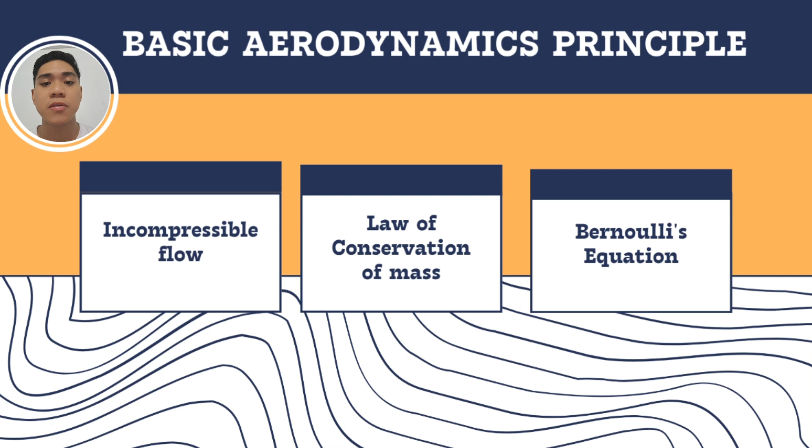Today, we will dive into the science that makes it all possible. In today's video, we'll be navigating through some fundamental concepts and applications about incompressible flow, conservation of mass, and Bernoulli's principle. In the latter part of the video, we'll also tackle some sample problems to help reinforce our discussion and show how these are applied in real-world scenarios, so we can have a solid foundation in aerodynamics and its practical applications. So without further ado, let's get into our discussion.

For our first topic, we have incompressible flow. When we say incompressible flow, it refers to a flow in which the density remains constant. Presented on the screen are some of its characteristics.

For the first characteristic, density is constant. In incompressible flow, the fluid density remains constant throughout the flow field. This means that regardless of pressure changes or velocity variations, the density does not fluctuate. This assumption simplifies fluid dynamic calculations, especially when applying principles like Bernoulli's equation or the continuity equation.

For the second characteristic, we have velocity less than 100 meters per second. At velocities below 100 meters per second, changes in pressure due to motion are so small that they don't significantly affect the fluid's density. This is often true for low-speed airflows and liquid flows where compression effects are negligible.

For our last characteristic, we have Mach number less than 0.3. The Mach number is the ratio of the speed of the flow to the speed of sound in the medium. When the Mach number is less than 0.3, the flow speed is much lower than the speed of sound, and changes in pressure due to the flow are minimal. In this regime, the fluid behaves almost as if it's incompressible, even for gases like air. In other words, the density changes are negligible at these low speeds.

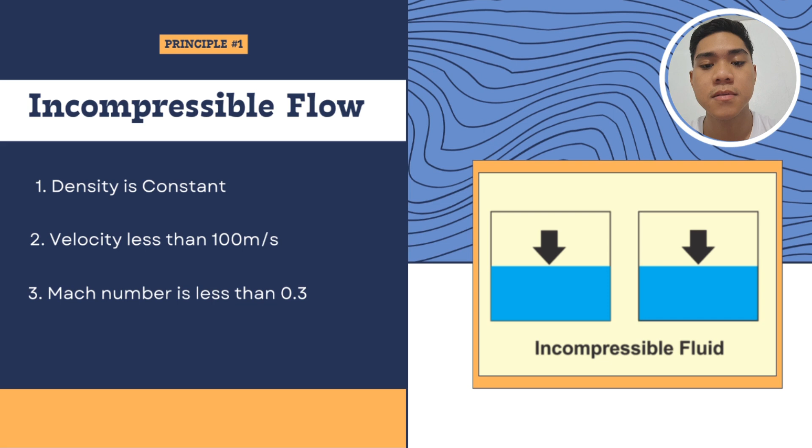For our next topic, we have the law of conservation of mass. The conservation of mass principle applies to both compressible and incompressible flow. Under this, we have mass flow rate and volume flow rate, both of which will be discussed. So what exactly is conservation of mass?

The law of conservation of mass dates from Antoine Lavoisier's 1789 discovery that mass is neither created nor destroyed. In other words, the mass of any one element at the beginning of a reaction will equal the mass of that element at the end of the reaction. So under this law, it states that mass can't be created nor destroyed.

This means we can't create new mass, and we also can't remove existing mass from an object. For example, take a piece of paper. Even if you tear it apart, what happens is it just turns into smaller pieces. Still, the total mass of the paper remains the same before and after tearing.

Next, we have mass in equals mass out. This means the mass going into the system is equal to the mass going out of the system. So if we account for it all, the total mass will be the same at any point in time in any closed system.

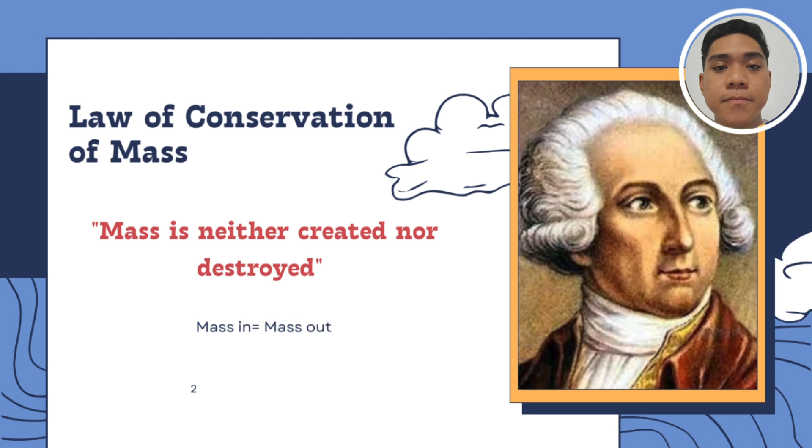So what is our equation for mass flow rate? We have mass flow rate, sometimes called m dot, which is equal to density times area times velocity. Mass flow rate is basically just mass per unit of time. Applying the law of conservation of mass, the mass entering the system is equal to the mass leaving the system, therefore mass flow rate 1 is equal to mass flow rate 2.

From the equation mass flow rate equals density times area times velocity, we substitute it in: mass flow rate 1 becomes density 1 times area 1 times velocity 1, which is equal to density 2 times area 2 times velocity 2. So now we have a relationship between density, area, and velocity under mass flow rate. Take note of this equation because it will be used for our sample problems later on.

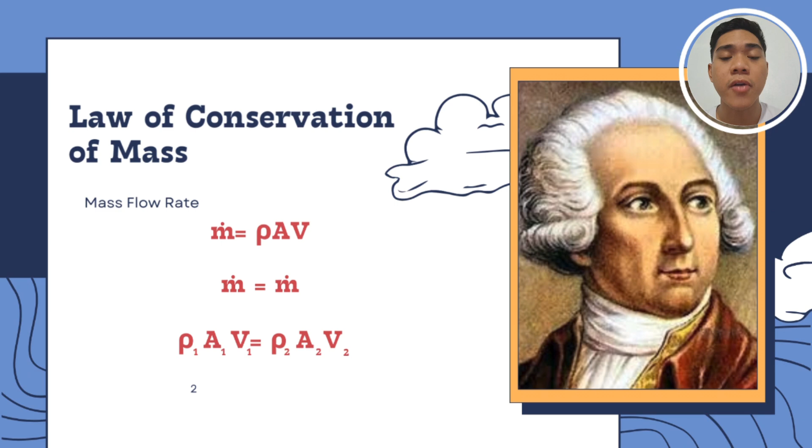So we're now done with the law of conservation of mass. Now let's proceed to Bernoulli's equation. Bernoulli's equation is primarily applicable to incompressible flow, where the fluid's density remains constant. This is because the standard form of Bernoulli's equation assumes that changes in pressure do not affect the fluid's density, which holds true for incompressible flows like liquids and low-speed gas flows where the Mach number is less than 0.3.

Bernoulli's equation is the principle that states that for an incompressible, non-viscous fluid, the total mechanical energy along a streamline remains constant. Mathematically, it is expressed as pressure plus rho v squared divided by 2 plus rho gh is constant. This equation shows us the relationship of the total pressure at any two points within the flow, meaning the total pressure at any point is always constant.

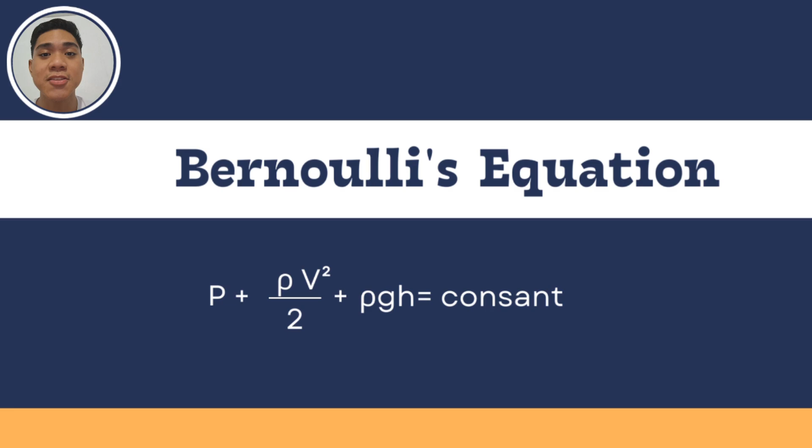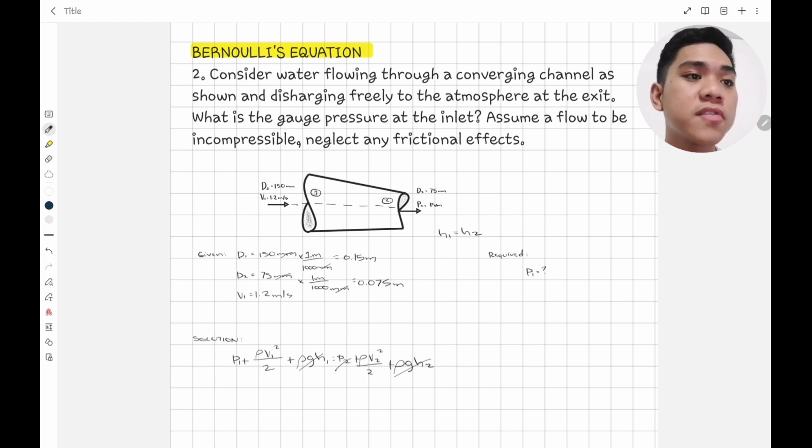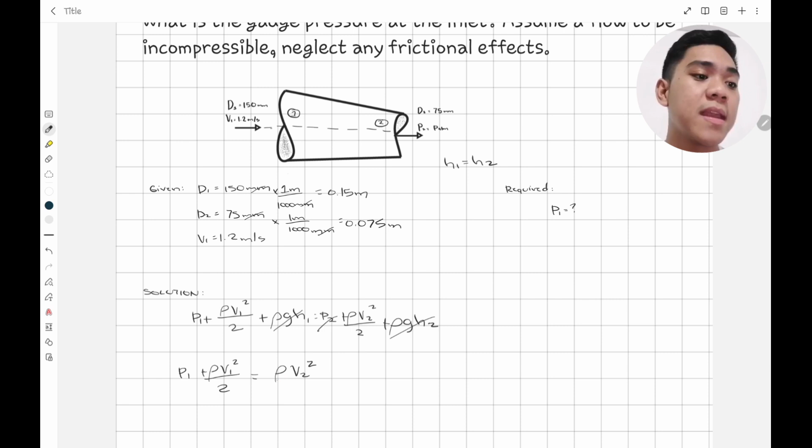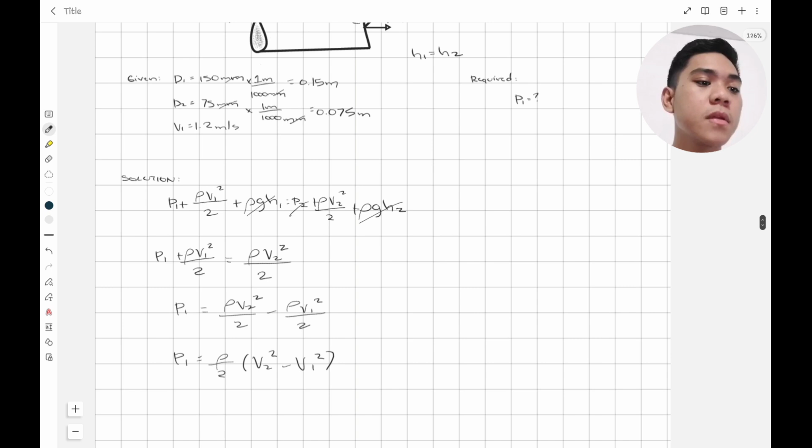So i-rewrite natin yung equation. Pressure 1 plus rho v1 squared divided by 2 is equal to rho v sub 2 squared divided by 2. Tapos i-transpose lang natin yung isang term. So we will have pressure 1 is equal to rho v sub 2 squared divided by 2 minus rho v1 squared divided by 2. Ang magiging result na after that is pressure 1 is equal to rho divided by 2 multiplied by V sub 2 square minus V sub 1 square.

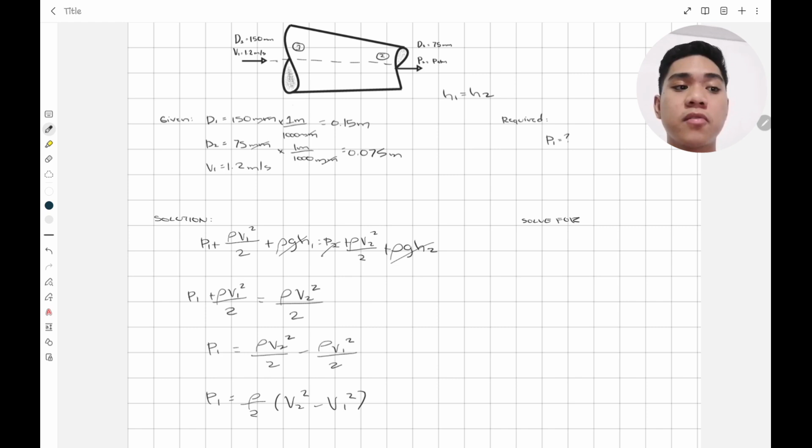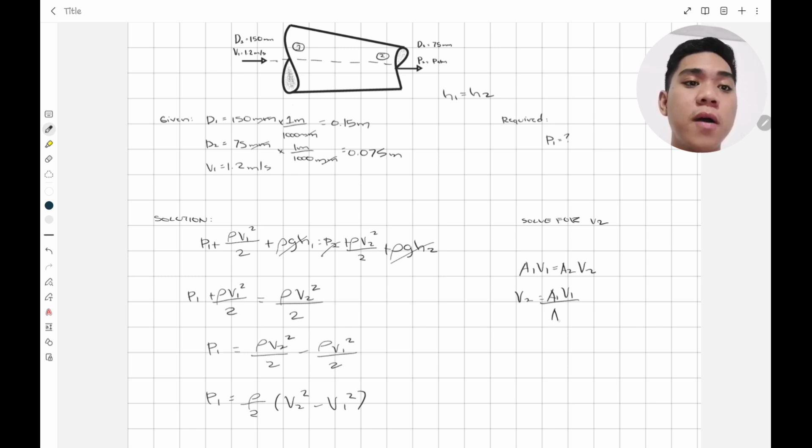Bale, finactor out lang natin yung equation na nakuha natin. Since wala tayong velocity 2, kailangan muna natin siyang hanapin using yung continuity flow na formula, which is A sub 1, V sub 1 is equal to A sub 2, V sub 2. So i-isolate lang natin ng V sub 2 since yun naman yung hinahanap natin. So, V sub 2 is equal to A sub 1 times V sub 1 divided by A sub 2.

Since wala tayong area 1 and area 2, kailangan din natin hanapin yung ating area 1 and area 2 by solving it using the area formula. Ang formula natin, kagaya lang ng ginamit natin kanina under law of conservation of mass, area is equal to pi diameter squared divided by 4. So let us start with area 1. For area 1, it is equal to pi times 0.15 meter squared divided by 4. So we will get 0.017671 square meter. And the next, for area 2, let's use pi,

Ganun pa rin, same formula, pi d sub 2 square divided by 4. Palitan lang natin yung ating diameter into 0.075 meter square. At ang makukuha natin na result for that is 0.004418 meter square. Since nakuha na natin yung dalawang area, pwede na natin siyang i-substitute doon sa equation natin in solving for the velocity.

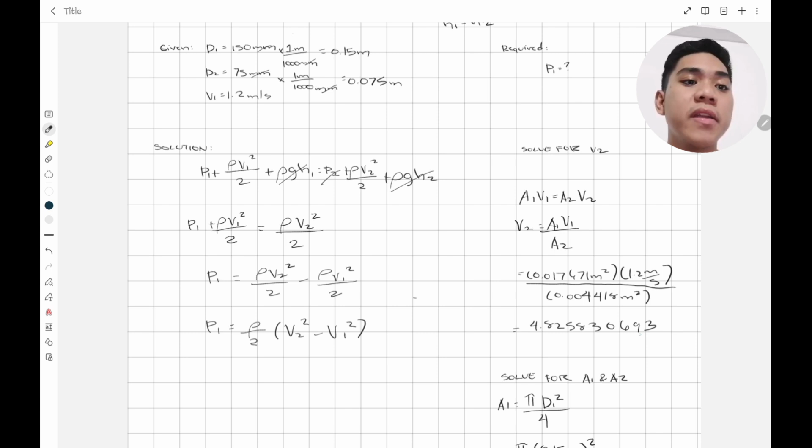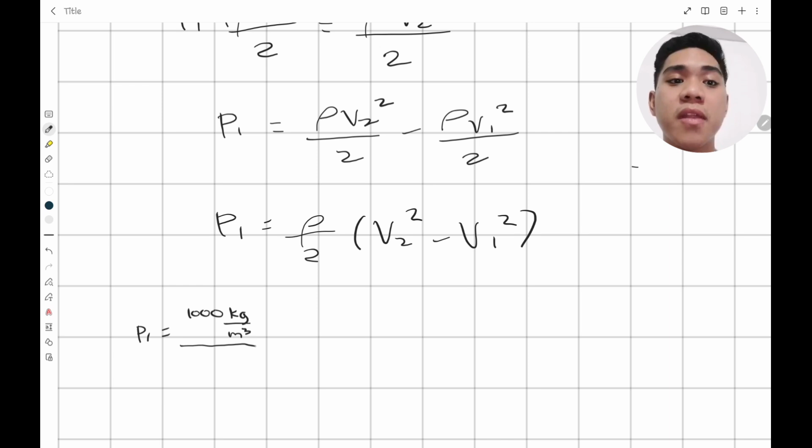I-substitute lang natin siya. So, area 1 is equal to 0.017671 square meter multiplied sa ating velocity 1 na 1.2 meter per second. Ito po ay given kanina. Divided by 0.004418 square meter. So, makakukuha tayo ng 4.825830693 meter per second.

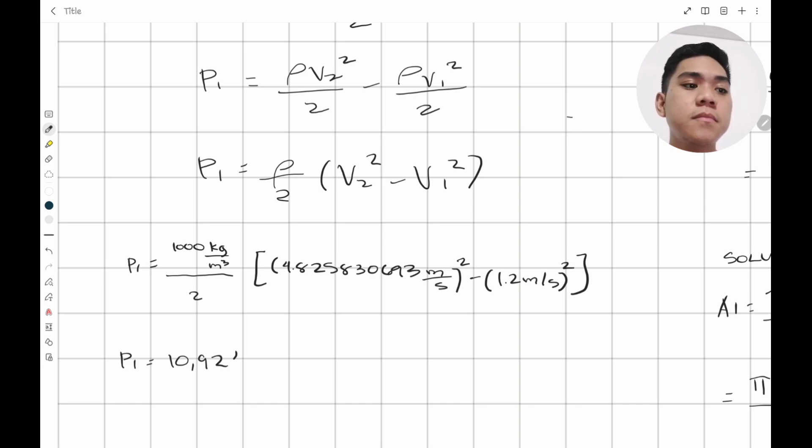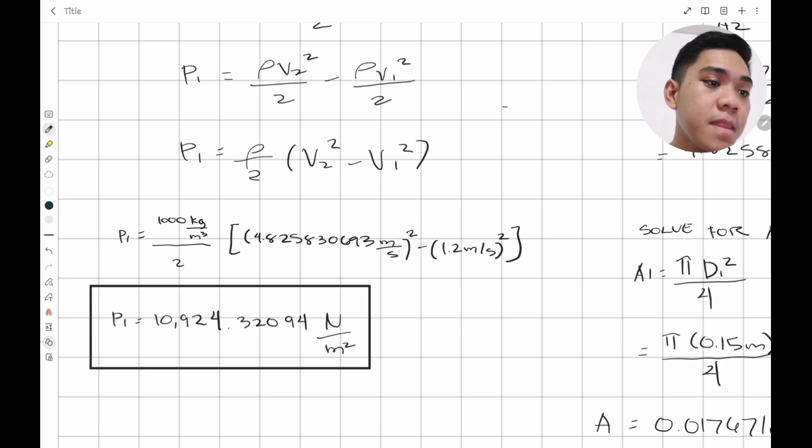Since nakuha na natin lahat ng values, isubstitute na lang natin siya sa ating working equation in solving for the pressure 1. Since water yung pinag-uusapan natin, yung density na gagamitin natin is yung standard density for water, which is 1,000 kg per cubic meter divided by 2. At yung nakuha natin na velocity 2 na value kanina, which is 4.825830693 meter per second, is-square natin siya, minus yung 1.2 meter per second squared. So after that, upon calculating, ang makakuha natin na value is pressure 1 is equal sa 10,924.32094 Newton per meter square.

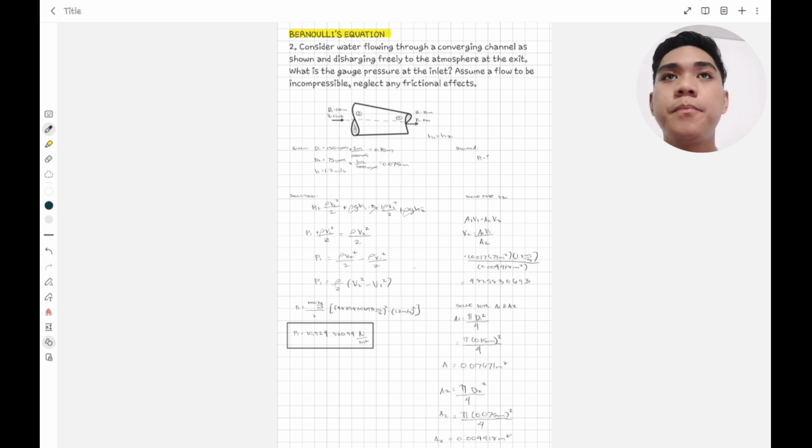Ayun, na-solve na natin ang dalawang equation, ang dalawang problem ng basic principles ng aerodynamics, which is under law of conservation of mass and Bernoulli's equation.

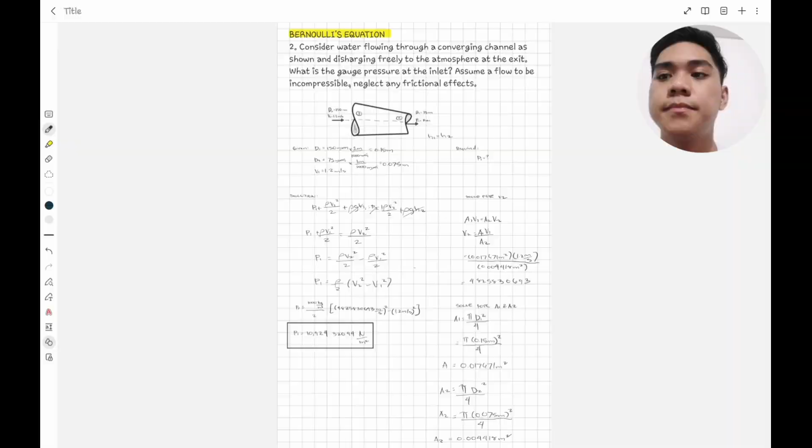To wrap up everything, today we learned that first, incompressible flow refers to fluid flow in which the density remains constant throughout the motion of the fluid. Yung assumption na ito is especially valid sa mga liquids which are nearly incompressible at sa mga gases at low speeds, where yung Mach number nila is less than 0.3, where yung pressure changes have negligible effects on density. Tsaka when working under the assumption of incompressible flow, it simplifies many fluid dynamic equations as it allows us na makapag-focus only doon sa velocity, pressure, and cross-sectional area without worrying about the variations ng fluid density.

Next is we have conservation of mass. So the law of conservation of mass, recall yung diniscuss natin kanina, states that mass cannot be created nor destroyed within a closed system. So, in the context of fluid flow, this law is expressed through the continuity equation, which dictates na yung mass flow rate ay kailangang mag-remain constant at all points along a streamline in steady state flow.

And then lastly, yung Bernoulli's equation, ito yung key principle in fluid dynamics na nag-explain kung paano yung pressure, velocity, at saka height interact in a flowing fluid. So sa incompressible flow, yung Bernoulli's equation states that yung sum ng pressure energy, kinetic energy, tsaka yung related sa fluid's velocity, yung potential energy na related naman sa height, remains constant along a streamline. So in simpler terms, as a fluid flows through different parts of a system, its velocity increases and then its pressure naman decreases and vice versa, while the total energy remains the same.